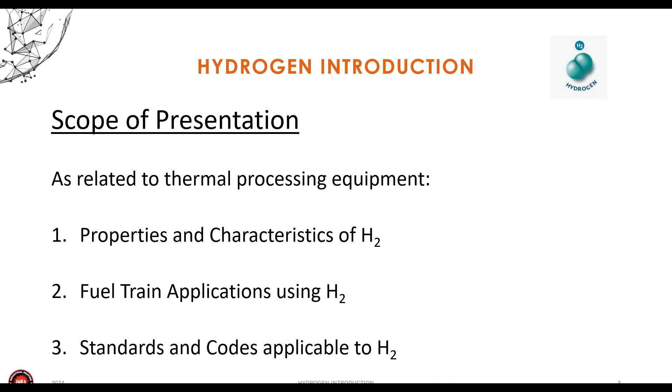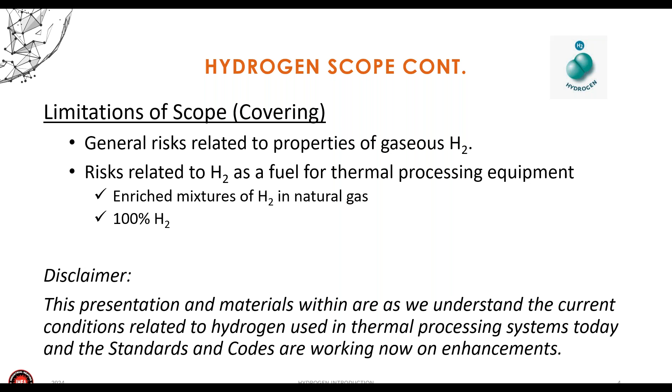Again, this is going to be general risks related to the properties of gaseous fuel and using it in thermal processing equipment. Really, there's two scopes when we talk about hydrogen as a fuel. There's enriched mixtures, where we're blending hydrogen into natural gas, and then we've also got 100% pure hydrogen used as a fuel. The disclaimer on this is that everything we're covering today is kind of in a moving state. Aside from the chemistry of it, the physics don't really change, but hydrogen used in thermal processing today, and with the standards and codes, is evolving. Just for example, when we created this presentation about a year and a half, two years ago, to today, what we're telling people and what we're seeing in the industry is changing. So pretty much after today, in about 6 months from now, you're going to see some different responses, specifically in the standards and codes sections.

Some of the things we are not covering: we're not going to get into fire protection, monitoring of buildings and rooms, or other safety type applications and hazardous location requirements. We're not going to talk about generating hydrogen at your facility using electrolyzers or storing it. That's a whole other topic on the supply side we may be getting into down the road. We're also not going to cover plant distribution systems, so how do I pipe it through a facility to get to the furnace.

We're not going to talk about hydrogen used as an atmosphere for heat treating, specifically like a Class C furnace in NFPA 86. That has been around for a while and is a whole separate topic. This is really about using hydrogen as a fuel.

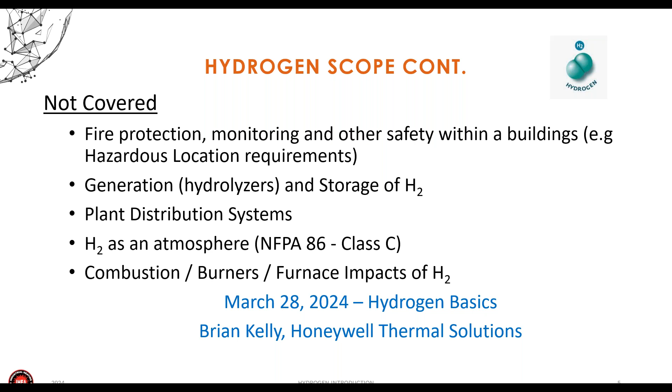We're also going to stop this presentation, from a detailed content point, at the inlet to the burner. So we're not going to get too far into the combustion discussion or the impact of hydrogen on burners and furnaces. We'll pick up that topic on March 28th with the next in this series of Hydrogen Basics, which Brian, who just did the introduction, will be covering. We'd like to see everybody sign back in and continue on with these topics.

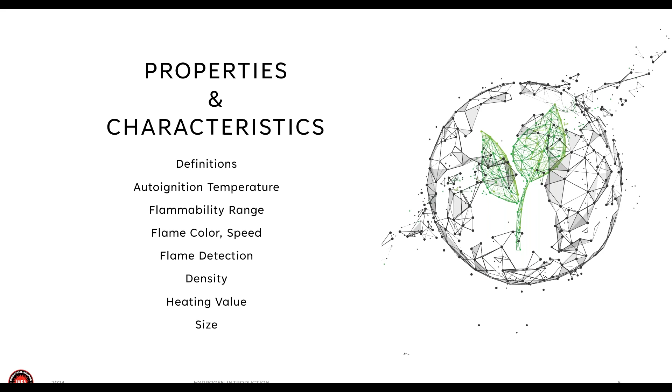So jumping into material here, we'll talk about the chemistry side of it and a little bit of the combustion introduction: things like its definition, characteristics of its flame, its temperature, its density and heating values, and ultimately its size as compared to things like natural gas and propane.

For this presentation, and in general when we're talking about using hydrogen as a fuel, we are talking about it as diatomic hydrogen, meaning it's paired with another hydrogen atom, or H2. If you're referring to atomic hydrogen, a single hydrogen atom, that's what you see on the periodic table. It is an unstable atom; it will want to bond with other things. So for the rest of this presentation, and in the future, it's always the conversation about H2, or hydrogen gas.

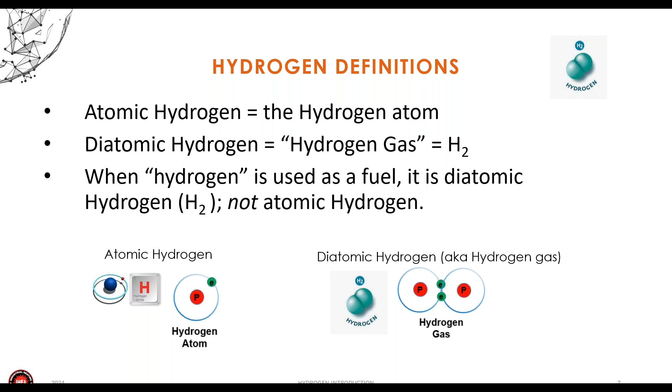Now, hydrogen, like many other fuels, is colorless, odorless, tasteless, and non-toxic. Typically we are adding odorants in order to be able to smell it. There is a standard for pure hydrogen to add ethyl isobutyrate, which gives you kind of a rotten cabbage smell. When we get into enriched mixtures, there really isn't a clear standard yet.

But typically when you're mixing it with natural gas, it has mercaptan, which gives you that rotten egg or sulfur smell. But it is an odorant that's allowing you to smell it.

The risk here is if you don't have an odorant, you're not going to be able to detect that hydrogen unless you're using something like a combustible gas detector or analyzer. If it's a leak on piping, you're using soap and water, looking for bubbles to try and find the leak. But in general, odorants are what are going to help us identify it from a smell point.

The other thing I want to mention is, in general, we always tell people never trust your nose. You shouldn't rely on just your nose to find leaks or smell it. There are people out there who are desensitized to mercaptan and can't smell it - I know of one or two people. So again, always rely on combustible gas detectors or some other method, not just your nose, to try and detect leaks.

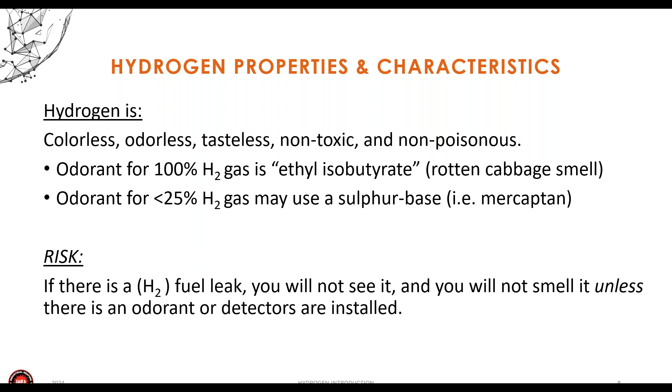Auto ignition temperature is another factor we want to take a look at. That is basically, when I've got a fuel mixed in air at the right ratio, what is the equivalent temperature I need to get the combustion reaction moving forward? You can see from the comparison between hydrogen and natural gas, they're very close in terms of auto ignition temperatures. That's good news for our burners and systems, where we don't have to do much different in terms of trying to get the reaction started.

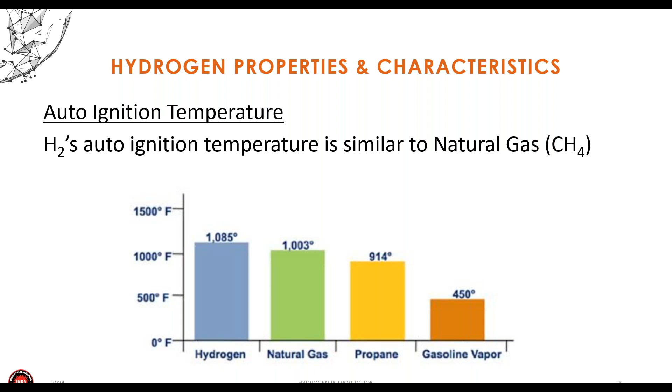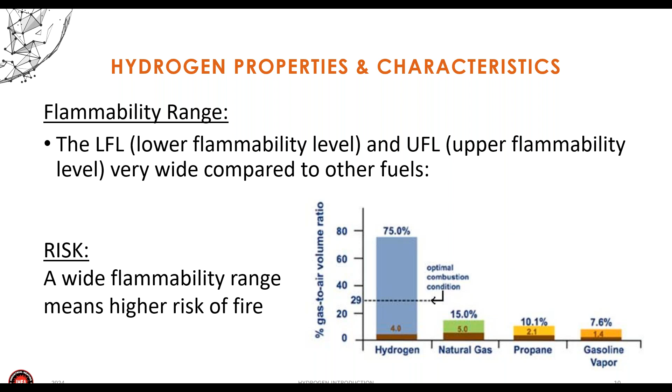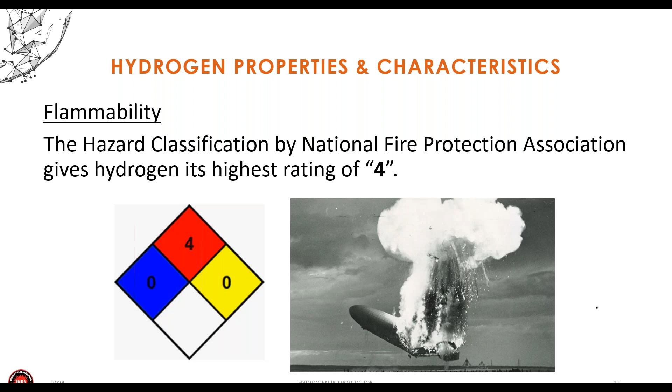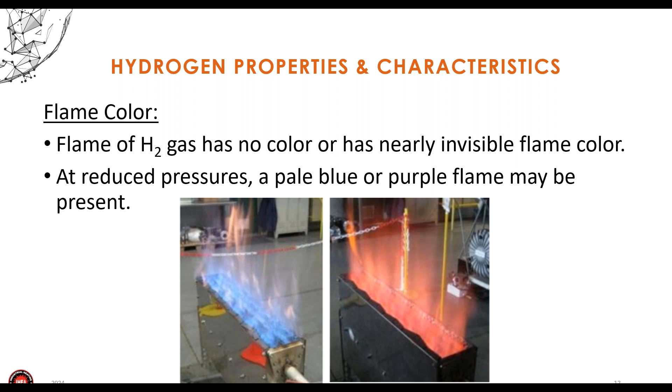On the left you see 100% natural gas, on the right a 100% hydrogen system. Most of the coloration you see, especially the yellows and reds, is because of some of the other stuff in the combustion air that's coming along. But you will see a much different flame profile depending on the burner as well, in terms of what you see.

These are all things that get taken into consideration a little later as we get into this next presentation on burning hydrogen. Thanks to the Honeywell Process Solutions guys, they did some videos on an Eclipse Thermjet burner, and this is a little video that shows some of the fuel switching, what happens when I go from 100% natural gas to 100% hydrogen and backwards again.

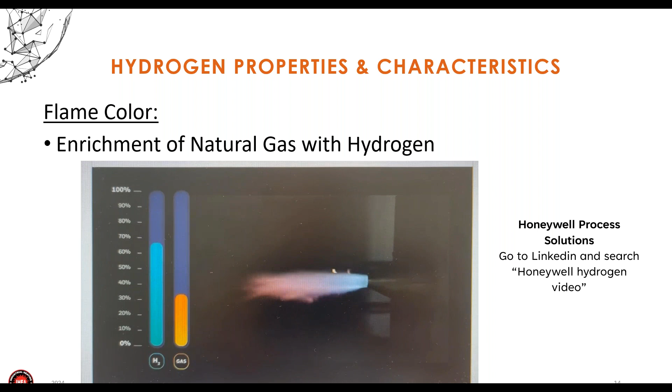So moving this forward, you'll just see steps. By the way, this video is kind of fast-forwarded, so it goes a bit faster in terms of the blending here. We would go a lot slower in reality. But you can see the flame envelope starts reducing down, less visible flame coming out of it, and your flame color starts changing as we move to 100% hydrogen.

Good news is that all of the burner OEMs out there, most of them who are in the industrial process arena, have tested hydrogen and know how to burn it. So it's not like this is a completely wide open field where there's no experience out there.

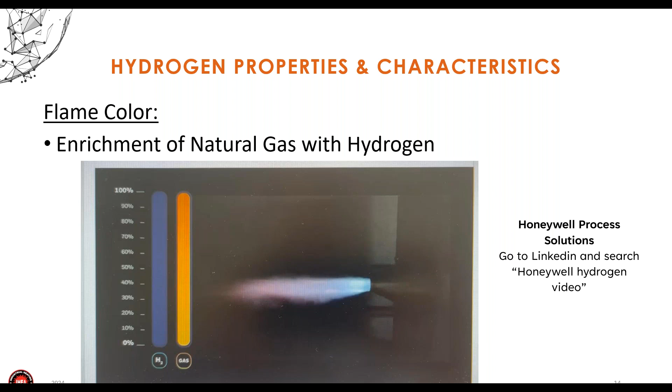Again, the biggest takeaway from this one is make sure that when you are looking at bringing hydrogen into your facility to run in a furnace, you're working not only with your furnace OEM, but also with the burner OEMs quite closely, to make sure we do it safely and effectively.

Flame speed and flame temperature are two other considerations. Natural gas has about a 1.3 foot per second flame speed. And when you're looking at a burner or a flame, the flame is actually trying to travel back to its source, so it's going back towards the burner. In the pictures here, it's actually trying to go down into the burner nozzle.

Hydrogen has a much higher flame speed, so there needs to be consideration for that in the design of the burner and the system. It means it has a higher rate of flashback, or a higher risk of flashback. So again, something to consider, making sure you engage the right people when you're looking at switching over to hydrogen.

Flame temperatures are very similar, and that's adiabatic flame temperature. So we're measuring the temperature of the flame in the core, before it starts getting infused with air and some other losses to the system. So pretty close in terms of flame temperature, not a major difference between the two.

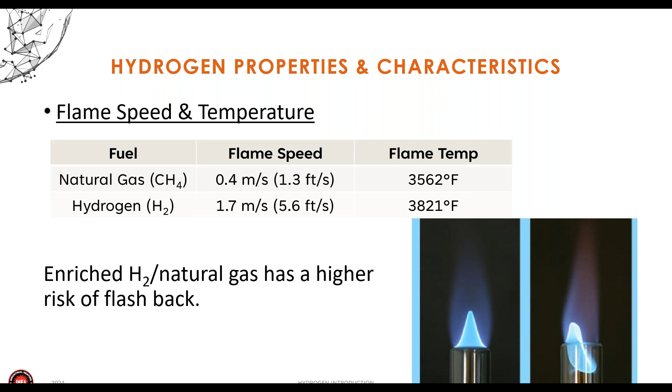One of the things you notice from the pictures as well is that I mentioned the flame isn't as luminous when you go to hydrogen. Part of that is it emits much less infrared heat, so the radiation coming off of the hydrogen flame is less than natural gas. There is substantial UV radiation, though that's not something we as humans can see or really feel too much, at least not in short-term exposure.

So there is a risk when we're looking at hydrogen flames that you don't get that same sensation of the radiation coming off of it. It could make people inadvertently get closer to a flame, or not recognize that there is one when there actually is. So just be cautious and aware of that.

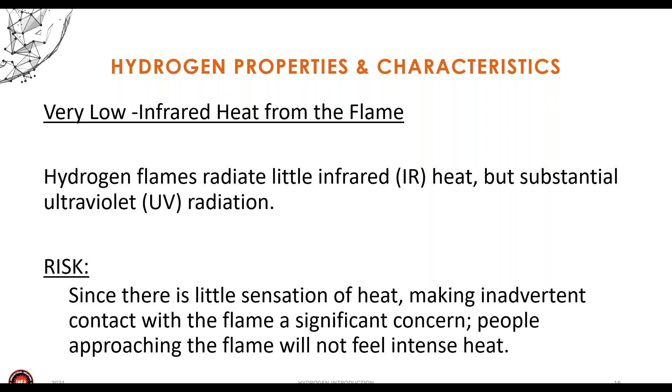That also impacts what we do with flame detection. Hydrogen flames are radiating more of their energy in the UV wavelength, less in IR. So we're going to typically use more of a UV flame detector when doing flame detection on burners. Flame rods are also acceptable up to about 90% hydrogen enrichment. Once we get over that 90% threshold, the way a flame rod works is more about almost like creating an electrical circuit, grounding out a loop.

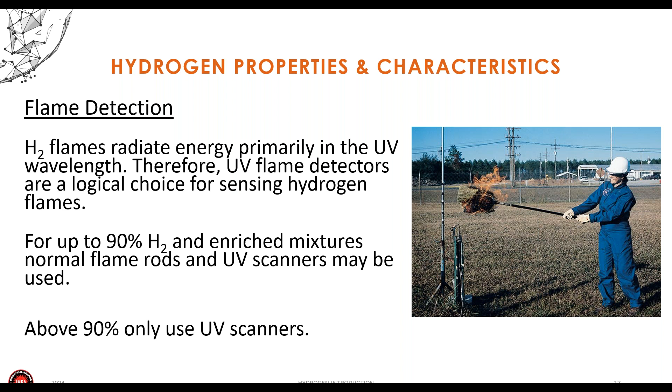As you get less of a flame envelope, the reaction on a flame rod is less, and they become unreliable. So if it's a 100% hydrogen system, you're typically only going to be seeing UV scanners used for hydrogen flames. That picture on the right shows a hydrogen flame where you can't really see it until it lights the room on fire. They're pretty invisible when pure 100% hydrogen, at least to the naked eye.

Heating value and density are two other characteristics that play into burner sizing or burner considerations and the fuel train sizing.

Hydrogen by itself has a heating value that's about 1/3 of that by volume versus natural gas. Natural gas has about 1,000 BTUs per cubic foot versus 325 for hydrogen. In the US we typically refer to the higher heating value; in Europe and other places they refer to the lower heating value. So you'll see different BTUs per cubic foot, as well as different units like kilowatts per cubic meter. But that difference between higher and lower heating value is nothing more than the heat of vaporization required for water - the losses in vaporizing that water vapor entrained within the fuels themselves. So a big difference there.

The risk when comparing just hydrogen to natural gas is that because of that lower heating value, I'm going to need a lot more volume going to the burner in order to get the same amount of heat into the furnace.

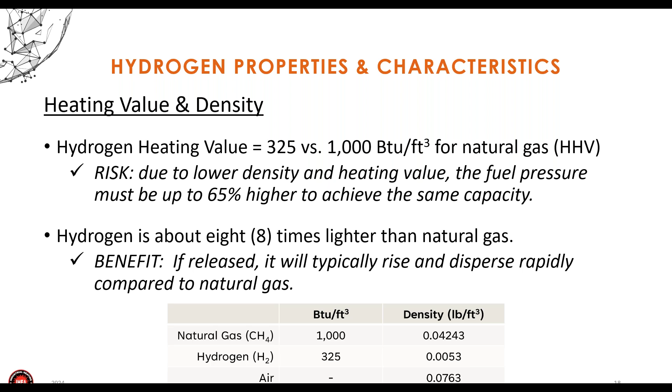Just from a sizing standpoint and comparing the two, there are going to be differences.

The last thing we'll talk about on the properties and characteristics is its molecular diameter. We're talking in terms of angstroms, and an angstrom is 3.9 times 10 to the minus ninth inch - pretty small. In general, hydrogen (H2) has a width of about 2.1 angstroms versus 4 for natural gas, so it's about half the size of natural gas.

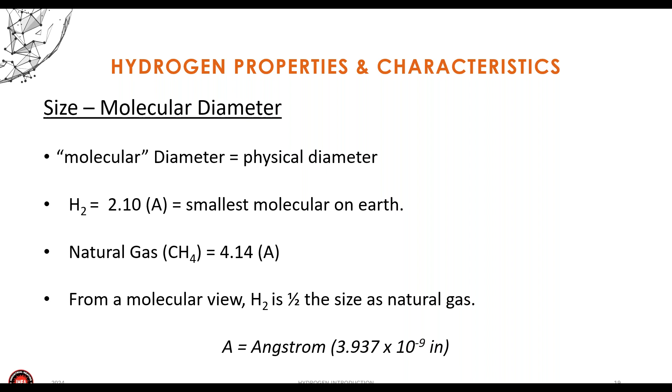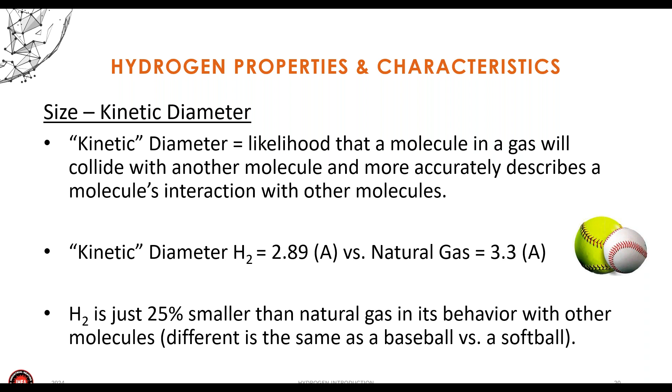That'll play into our conversation about fuel trains and safety shutoff valves and leakage rates. But we don't necessarily always talk about just the size by itself, because when hydrogen and natural gas are in a mixture, they tend to vibrate and bounce around. The likelihood of them bouncing into other molecules and interacting with others is called the kinetic diameter, and the kinetic diameter is actually a little bit closer for hydrogen versus natural gas - about 25% smaller kinetic diameter. Again, that plays into our conversation about component certification and leakage rates for the fuel train and leakage in general.

So that's the basics on some of the characteristics of hydrogen. Next, we'll talk about starting to apply it to fuel trains.

This, I'll tell you, is a little bit more of a gray area, especially when it comes to the standards and codes, but we have learned quite a bit about how to run hydrogen through systems today. So first, we'll start with leakage rates and valve seat leakage.

Again, due to its size, hydrogen is more susceptible to leaking, finding its way through gaskets and through any pinholes or anything we might have in the fuel train. When we're talking about fuel train risks and leakage, it's a good note to point out we're not talking about only leakage through a valve seat, like a safety shutoff valve, but also external piping, flanges, gaskets. It's really a holistic look when we say a leak.

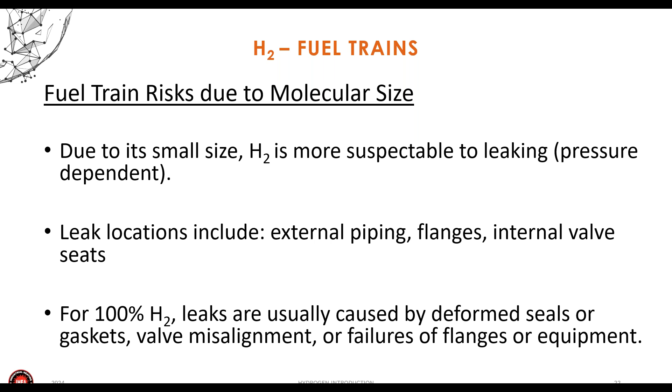Normally in practice, if we're finding leaks, be it natural gas or hydrogen, typically it's caused by some human error - a deformed seal or gasket, valves not aligned properly on the gaskets, or the threads weren't done right. Failures of the equipment itself, people hitting fuel trains with lift trucks - that's happened in the past. So if designed right, they are pretty much leak free, and we shouldn't have to worry too much about it.

But in terms of some examples, I've got two examples of how hydrogen does create an increased leaking risk. These were done in our lab in Germany, some testing. These are on a 2-inch Dungs MBE dual safety shutoff valve, one of our newer safety shutoff valves, so 2 valves in series. These do have a 15 PSI rating on them.

In this case, we had a leaking valve, and it was just one of them was leaking - if I remember correctly, I think it was the first one, the V1. What this is showing is at a 15 PSI inlet pressure, how the leakage rate gets affected just by the type of gas we're putting through it. So in the first bar chart on the left, we've got air at 15 PSI. Internally through the valve, we found it was leaking at about 3 cubic centimeters per hour. Just for reference, a cc is a cubic centimeter - a flu shot on average is about half a cc. So that's like saying we have basically 6 little flu shots leaking past the valve seat per hour. Definitely not a lot of volume.

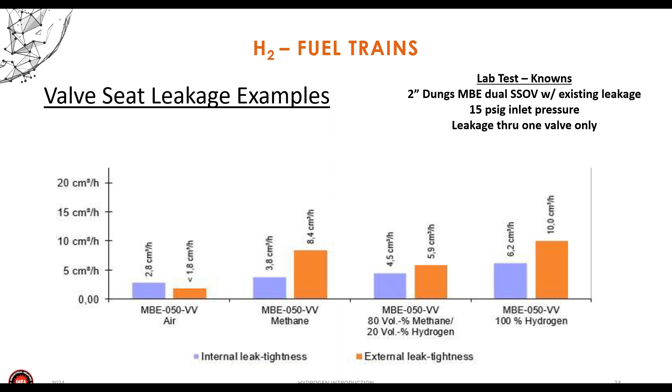This is really a slide to show that example. This is one of our single safety shutoff valves used for high pressure systems - a 2-inch valve rated for 100 psi max operating and close-off pressure, and we tested it at 15 and 150 psi, so over its max operating pressure.

You can see with minimum air pressure and minimum 100% hydrogen pressure at 15 psi, there's almost no leaks whatsoever. When we take it in excess of its operating pressure with air, you start getting leaks, and with hydrogen, the leak rate increases quite substantially.

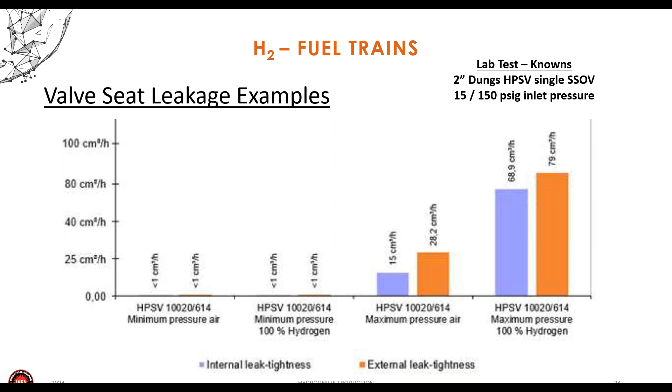So really the message here is when you're designing fuel trains and looking at systems in general - and this goes for all fuels - make sure you're looking at what the max operating or max allowable working pressure is, what it's rated for, and never exceed that pressure. That's why those ratings are out there, and that's why their certifications, labeling and listing state those items.

Vent limiters are another topic to cover. Vent limiters are devices that safely allow you to vent a diaphragm type device without having to pipe it outdoors. So vent limiters restrict your flow on a diaphragm failure to 1 cubic foot per hour or less of fuel.

There is some concern for greater leakage rates when using vent limiters with 100% hydrogen. Today, they are certified - if you have a vent limiter and the device is certified for hydrogen, they're okay. For enriched mixtures, they're pretty much theoretically equivalent because it's mostly natural gas anyway. There is some further discussion going on about vent limiters when used with hydrogen, but we don't really have anything to tell you much more on that at this point in time, other than if I've got a component that's certified or labeled and listed from UL, FM, TÜV, or CSA, and it's certified for 100% hydrogen with a vent limiter, you're good to go for today.

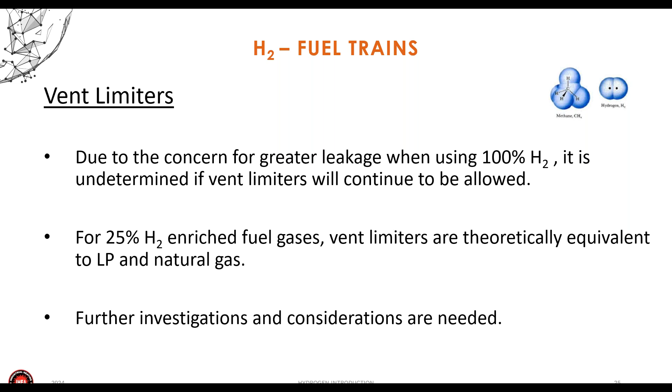When in doubt, always ask or talk to your authority having jurisdiction, be that your risk insurer or your local jurisdiction like your state. They will always be able to comment on those topics as well.

The last major topic of hydrogen use is material embrittlement. Embrittlement is an interior degradation or deterioration of the material because of a hydrogen reaction to it. This leads to cracks, failures, things you can't see in both metallic and non-metallic parts.

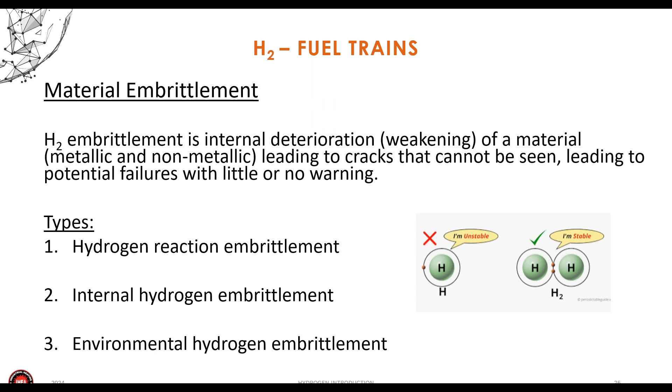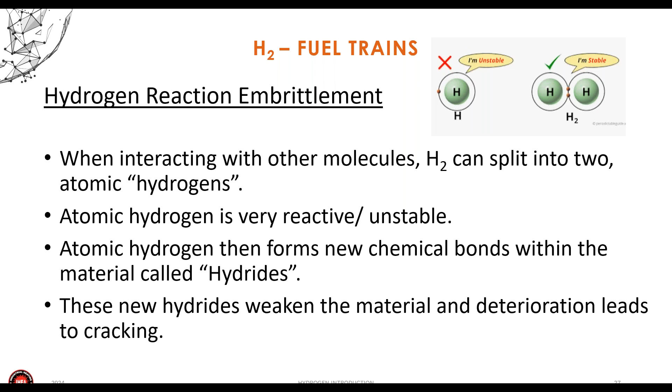We've got a couple different types of hydrogen embrittlement - there's reaction versions, there's internal pressure-related embrittlement. But in general, it's when the hydrogen H2 breaks apart, which happens often, and you have a lone hydrogen atom by itself that's unstable, it's going to want to try and bond to something. So whether it bonds to iron or other materials, it'll form what's called hydride, and those hydrides tend to weaken the materials, and deterioration then starts beginning.

One of the things that's changed, or rather as we've gone deeper into this, hydrogen embrittlement is really pressure dependent. The higher the pressure, the increased rate of embrittlement will occur. When we talk about high pressure, it's typically greater than 66 or 75 psi. Those numbers come from the standards for the USA and Canada, so depending on where you're looking, anything over 66 or 75 psi is considered high pressure, where I need to start being concerned about embrittlement. It's a long-term effect, so we're talking years, not days. Nothing's going to happen overnight usually with embrittlement, and it's related to all materials coming into contact with hydrogen.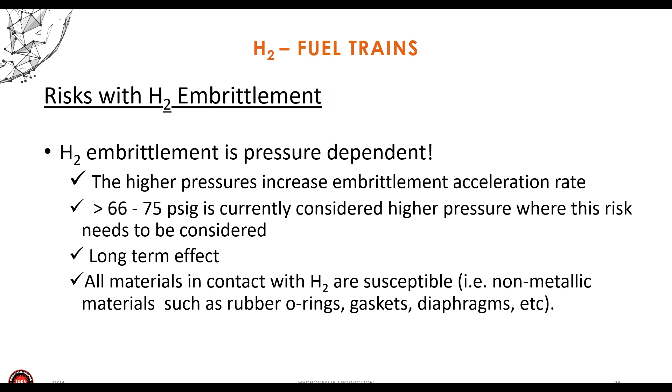Here's just two examples of hydrogen embrittlement: cracks in materials and in a flange. Just to give you an example of what we're talking about when we say cracks.

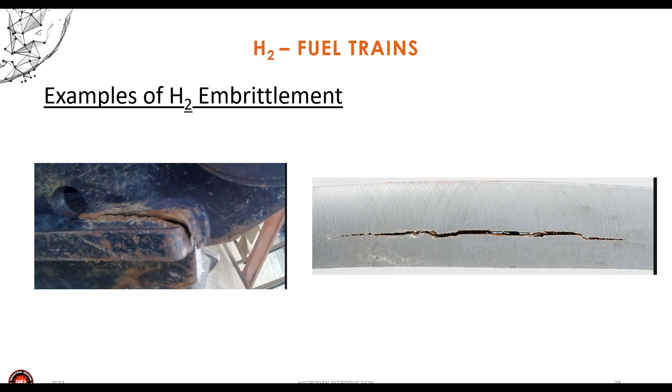As we start talking about sizing of fuel trains, in general when I'm designing a fuel train for a burner system, it's the same process you go through. We're not going to get into sizing anything today, but typically I'll start with my burner and what its flow rate and inlet pressure needs to be, then work backwards to design the pressure regulator, two safety shut-off valves in series, and all the stuff I need to meet code requirements, then operate from an air-fuel ratio standpoint, flow control, and come up with my pressures, flows, velocities, and what's acceptable to design the size I need.

When comparing straight up natural gas to hydrogen, I need 3 times the amount of volume at the same given pressure. For example, if I've got a 1,000,000 BTU per hour burner, I'm going to need 1,000 cubic feet per hour of natural gas to get that 1,000,000 BTUs out of it, but I need 3,000 CFH of hydrogen. So in general, if I've got equivalent pressures, I'm going to need a larger fuel train.

Not too big an issue when talking about new systems, because I'm going to design it fresh and new, not dependent on any other fuels. I can reduce that pipe size by increasing the pressure to get the flow up, and the velocities will go up as well. But in general, it's going to be a larger pipe size.

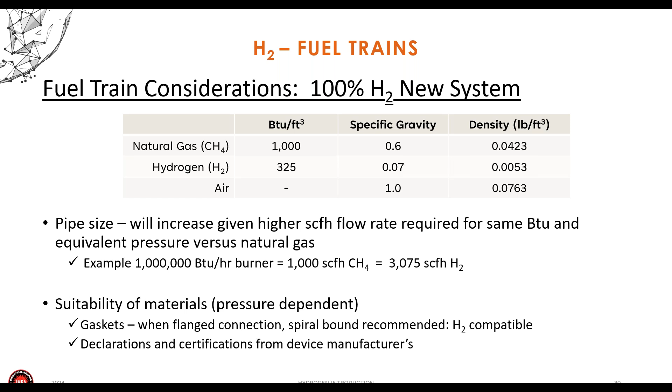Also be concerned with gaskets. We at Dungs use spiral wound gaskets instead of your standard typical gaskets. It compresses a little bit better, making it harder for the hydrogen to seep out. But getting a 100% hydrogen fuel train today is not a tough thing. Just for example, today at Carl Dungs, if you go through our literature, pretty much all of our devices are certified for hydrogen. The same goes for a lot of other manufacturers. I know Siemens has hydrogen certifications, Honeywell does too. So the equipment's out there and the capability is out there to do it.

When I get talking about enriched systems, that's where I'm enriching up to 25% by volume of hydrogen in methane or natural gas. I start talking then about a thing called the Wobbe index. Wobbe is basically the interchangeability of fuels, so if I set two Wobbes equal to each other for two different alternate fuels, I should be able to run that combustion system without people knowing I'm really switching fuels. What's interesting is even with the lower heating values of hydrogen and lower densities, the Wobbe index is pretty much similar. You can see that even when mixing 20% hydrogen, it's pretty much similar to what natural gas would be in terms of a Wobbe index.

Just another note, you'll see the 25% enriched systems is kind of a general line in the sand that we've started seeing. Europe is talking about enriching their natural gas pipelines up to 20% by volume. Some of the other standards and code committees have kind of drawn a line at, well, we'll go from 0 to 25% enrichment; anything over that is kind of going into different buckets for consideration.

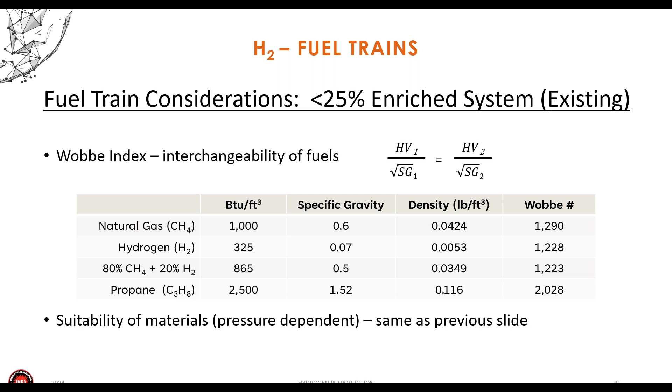So that's all we're going to cover with the fuel trains. The last piece here is what we know today about the different codes and standards that are out there, and again, this is specific to the thermal processing industry.

Starting with storage, there are already standards out there that have been created and have existed for quite some time. The use of hydrogen in industry is not new. People use it for heat treating. Steel plants and petrochemical plants have been using hydrogen for years. So there are standards out there.

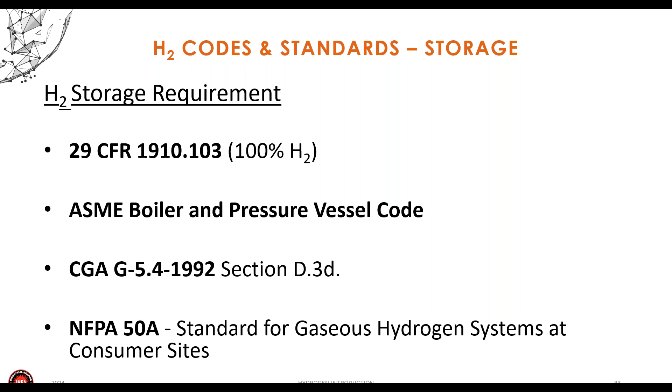29 CFR 1910, Code of Federal Regulations, is for 100% hydrogen storage systems. You've got the ASME Boiler and Pressure Vessel Code that dives into hydrogen storage. The Compressed Gas Association has one as well, and NFPA 50A is for storage of hydrogen systems at consumer sites.

As I get into fuel piping, that's the distribution system between the storage and my furnace or oven. The ASME process piping sections B31.12 and 31.3 will cover the 100% hydrogen and enriched mixtures today. Normally when we're talking thermal processing and natural gas, the National Fuel Gas Code, NFPA 54, is the one we go to. Today it does not address anything hydrogen or anything about enriched mixtures of hydrogen in natural gas.

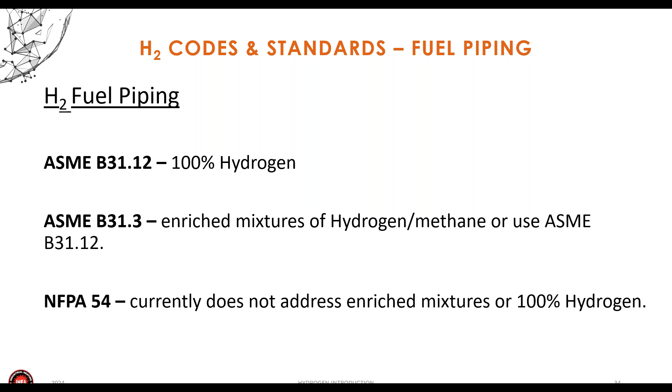I'm pretty sure they're working on it. There may be some changes coming, but there's nothing really to report, at least during this webinar today.

The key thing I do want to mention for any type of fuel piping distribution system, whether NFPA 54 covers hydrogen specifically or not, it still should be looked at in terms of installing new piping or modifying piping. There are procedures and requirements for proper isolation, purging of the line to get air out of it, and introducing your fuel for the first time using nitrogen as your purge gas. There's pressure testing requirements too. NFPA 56 is for purging and cleaning of high pressure systems, in this case over 125 PSI.

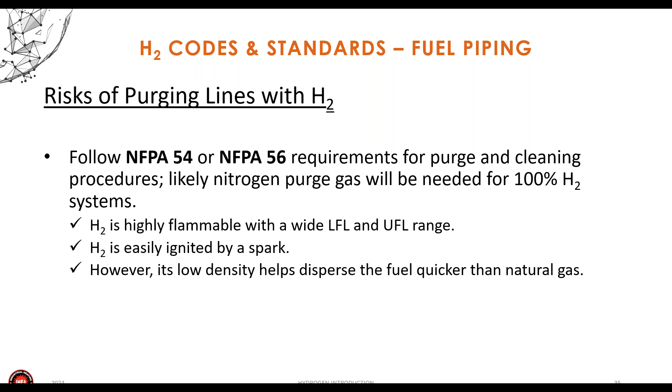But always refer back to those if you are getting hydrogen brought into your site as a fuel, because there are some risks associated with bringing that fuel online.

In terms of buildings and rooms, there are gaps right now for mixtures that are out there. NFPA 2 is our Hydrogen Technologies Code, currently the '23 edition. It does cover generation, installation, storage, use and handling for greater than 95% by volume. It today does not cover enriched mixtures. However, there are proposals existing today for expanding that scope to include combustion fuel mixtures of up to 25%.

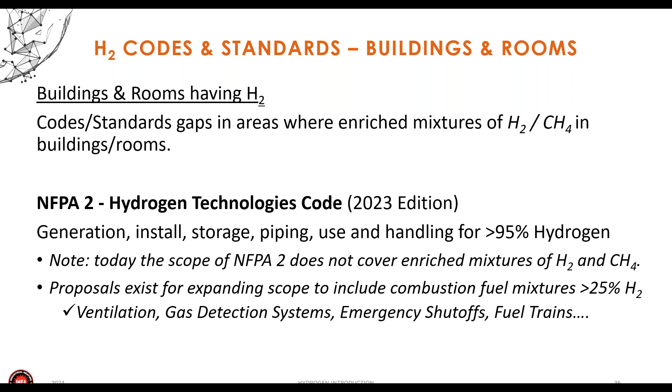That includes specifics about combustion air ventilation in the rooms, gas detection systems, in-situ type gas detection systems, emergency shutoffs, getting into fuel trains, just some additional scope that they're looking to expand into. So down the road, may have more to report on that as it progresses.

When I get to my thermal processing equipment, my furnaces and ovens are going to be covered by NFPA 86. NFPA 87 is going to be for my thermal fluid heaters, which is a different type of thermal processing equipment. But the fuel trains and the burners and all that are really going to be covered under those two standards for your furnaces, ovens, and thermal fluid heaters.

Looking elsewhere within a facility, residential and light commercial appliances, air heaters, there are ANSI standards. Folks are working on that as well to introduce language and requirements for covering systems up to 25% of hydrogen enrichment. The key is that standards exist, fuel train requirements exist today. Even if they don't say hydrogen, they're still your best place to go to look for information or make sure you're designing your system safely.

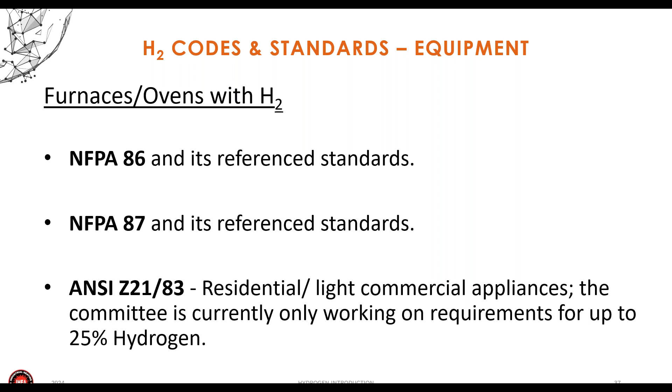Again, there's gaps in these standards. Everybody is starting to work on them. Typically, everyone's starting again at that 25% enrichment or less. Some of them are going up to 100% hydrogen, but things are changing relatively rapidly in the standards fields.

One other note I'll mention is that when we're talking about standards and codes, they're typically retroactive, meaning something happened or we learned something in the field and then they change. They're not necessarily very forward-looking as a prescriptive standard. So they are a little bit behind always in terms of addressing new technologies and things that are out there in the field. So expect more to change on all these standards in the coming years.

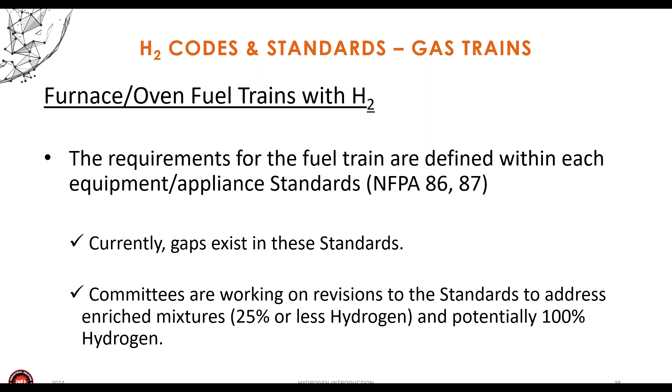Now, an example is NFPA 86 did recently change. We are now on the 2023 edition, and they have included the words hydrogen gas and hydrogen gas mixtures in the scope for acceptable fuel gases. This is the only reference to hydrogen as a fuel in NFPA 86.

So while it's an acceptable fuel, it isn't specifically addressed for any other additional safety requirements other than what's already out there for gas trains and safety systems in the appropriate sections, specifically here in section 6.2 for gas trains. So there'll probably be more coming on that as the committees work through things, but again, that's the only place it's referenced as a fuel.

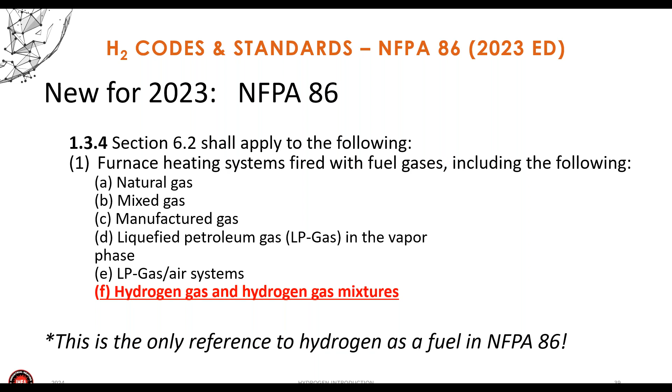It does show up, the word hydrogen, in the Class C section for atmospheres, for heat treating furnaces, but again, that's been there for years. So we're talking a little different scope.

Lastly, diving a little deeper, when I get to safety shutoff valves, pressure switches, pressure regulators, all that - I'm talking about labeled and listed devices - there are standards out there that cover hydrogen already. For example, UL 429 is for safety shutoff valves. It already had full coverage for hydrogen. So again, when you look at a Dungs safety shutoff valve, we've had it tested and it's capable of doing up to 100% hydrogen as a fuel gas.

Other ones, using our company as an example since I know it best, but a lot of other people have these same certifications. Componentry is out there, the ability to build a fuel train is out there.

UL 353 is for your limit controls, for example, pressure switches. That also includes up to 100% hydrogen. Just a note that UL 353 is being sunsetted - there's a new standard replacing it, IEC 60730. There's -1, -2, depending on what specific component you're looking to get labeled, listed, or certified. But that is changing, so that title will change down the road here.

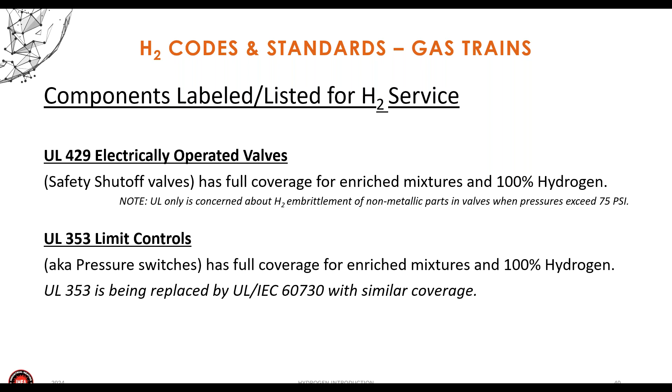As we dive a little further, like manual valves, piping and fittings - again, ASME covers our piping, fittings, all the pipe nipples, all that good stuff. All your flow control valves, regulators, and manual valves - again, ask about it from the manufacturers, make sure you get their declarations or their certifications.

There is still work in progress on some of the higher and medium pressure regulators, and I kind of will draw the line at about anything over 10, 15 PSI regulators. There are some changes coming for hydrogen on that.

But other than that, these are just a snapshot of some of the standards that are out there. There definitely are a lot more when you expand out and say, okay, I want a CSA certified device, I want a TÜV certified device, I'm going into Australia and I need to be AGA certified. So this list becomes extremely long, and we're just giving you a sampling of some of them that you should be asking about.

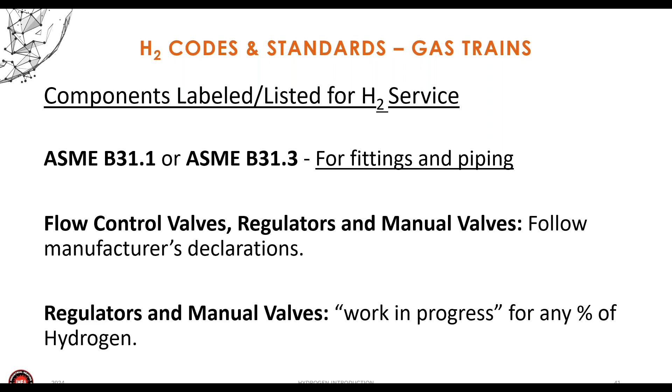So that's our primary coverage for the introduction of hydrogen in thermal processing. Just a couple quick reminders and review items here.

First, remember that flammability range - it is quite wide. It's got the highest hazard classification for NFPA as 4. So again, going from 4 to 75% by volume in air, it'll have a combustible mixture. Watch those open flames - again, we don't have a lot of infrared coming off of them. They can be closer to invisible by the naked eye, so you can get a lot closer to them than you think.

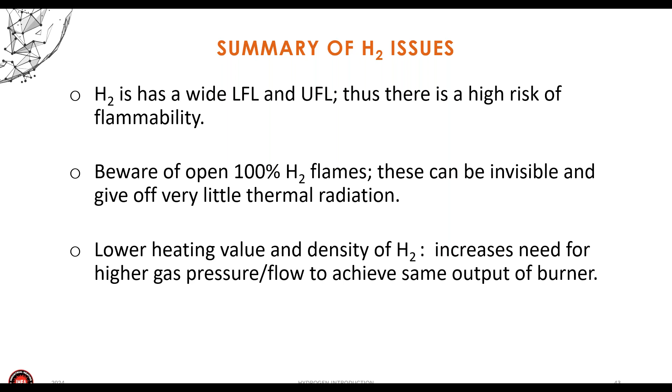That lower heating value and lower density increases the need for higher gas pressures and flows to get the same output of a burner. So you're going to see some different sizing in your fuel trains, as well as be considerate of the leakage rates.

When you're doing bubble testing, which is an annual requirement per NFPA 86, which is testing each of your valve seat leakages, the threshold for an acceptable leakage changes whether it's natural gas or hydrogen. So be aware of that. Embrittlement, again, really up to 75 PSI - we're not concerned about it in our fuel trains. Just, again, make sure all of your components are acceptable to be used with hydrogen or are certified to it or labeled and listed.

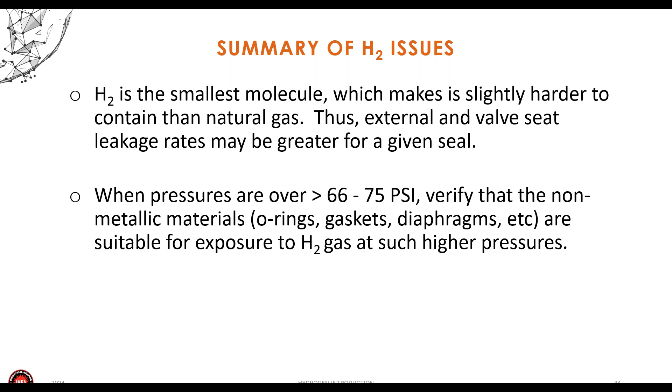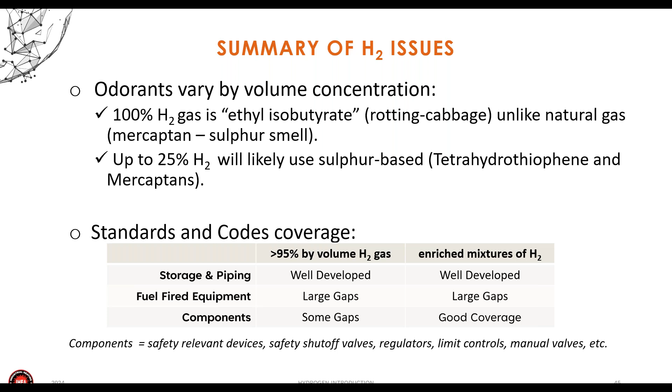So on that note, we're done with the content. I appreciate the time and everybody's attention during this webinar. I think we'll open it up for any questions at this point, if there's anything that popped in on the chat.

Thanks, Jason. Yeah, we did—Mr. Rogelio Perez basically asked, is it safe to take an existing fuel train and enrich up to 25% hydrogen without changes? So in all these questions, I'm going to give the 'it depends' answer, unfortunately.

You absolutely want to still evaluate that fuel train. Go back to whoever provided the fuel train—if it's on a furnace or boiler, go back to the OEM and say, hey, we've got enrichment coming, can you take a look and make sure each component is good, the pressures, the flows, the velocities. I would not just assume it's good, because some of the codes are changing. We also don't know how old that fuel train is—it may be out of date from a safety standpoint. But any change of fuel or operating parameters requires you to go back and reevaluate everything. Hopefully that answered that.